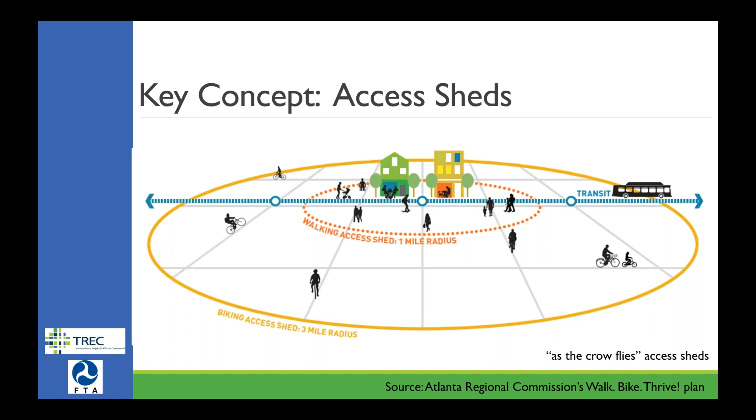However, in actuality, pedestrians and bicyclists are constrained to the available sidewalks, crossings, and bike routes, and agencies are increasingly looking to network analyses to calculate the actual distances for both pedestrians and bicyclists using the available facilities. These true travel distances more accurately illustrate how far someone would be willing to walk, taking into account the existing street grid, the existence of potentially poorly connected networks, barriers to travel caused by things such as railway, freeway, or waterway crossing points and limitations.

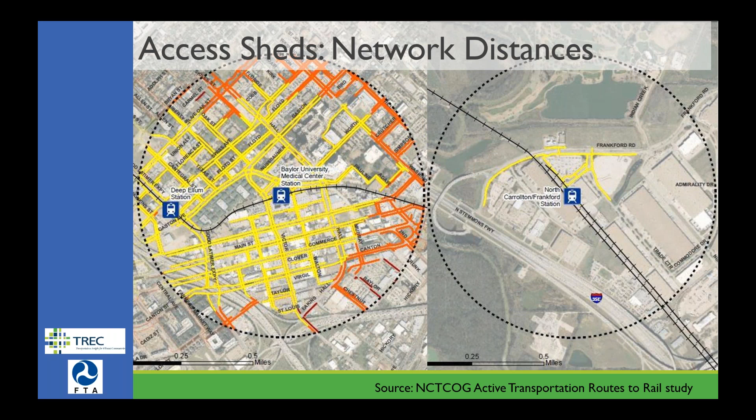In this example from the North Central Texas Council of Governments Active Transportation Routes to Rail Study, that's a mouthful, the yellow lines represent half-mile walk sheds taking into account the existing sidewalk network. So you can see, a well-connected network makes a big difference in how far someone could get within half a mile of walking. And this is an extreme example, but it shows the difference.

LA Metro, in its first last mile strategic plan, developed a program to improve and expand access sheds for users traveling to and from stations. And they propose to do this by increasing the average speed of active transportation users through measures that decrease crossing wait times, such as signal prioritization, and improved walking and biking speeds and capacity through route improvements; by decreasing the distance needed to access stations by fixing gaps in the network, adding crossing opportunities, and exploring creating shortcuts.

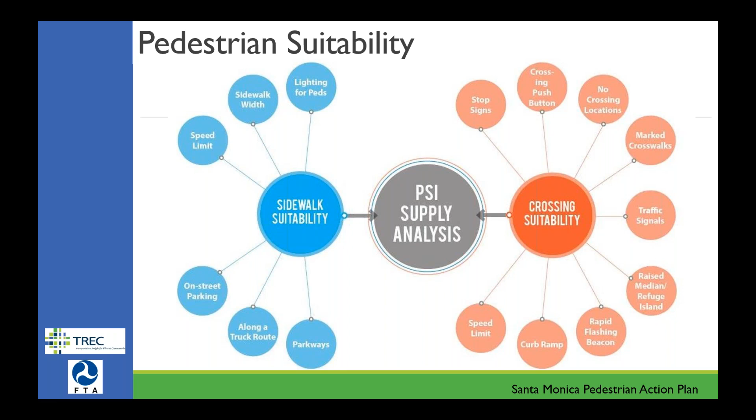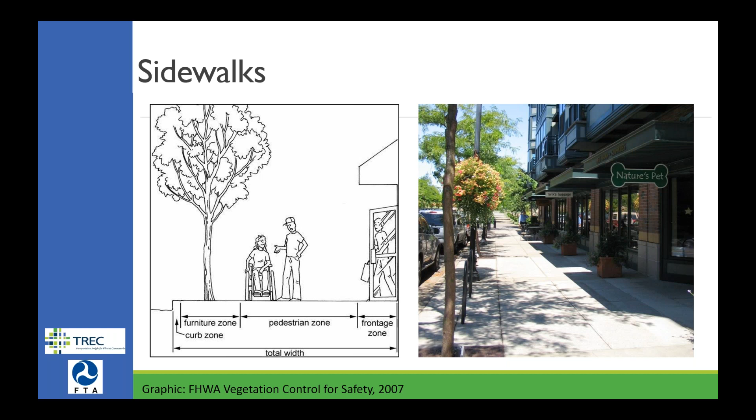In general, sidewalks should provide clear space for passage while taking into account other possible activities, from accessing buildings, as in the frontage zone shown in the diagram to the left, to features that increase comfort, like trees and benches, in the furniture zone, that can also be used for bike racks and that sort of thing, trash receptacles. But the key point is to have a walkable area where people can get by and get where they want to go.

And I'm going to go into a short case study here. So in this example from Atlanta, we learned that improving the road environment to and around bus stops can have a huge impact on the rider experience and rider safety. Many of you may have heard of the Buford Highway in Atlanta and suburban Atlanta. It's a 6-lane arterial that originates in Midtown Atlanta and serves as a vital connection to the northeast suburbs. In the last 15 years, a heavily transit-dependent Hispanic population grew up along the highway, increasing the number of people that needed to access transit along the busy arterial.

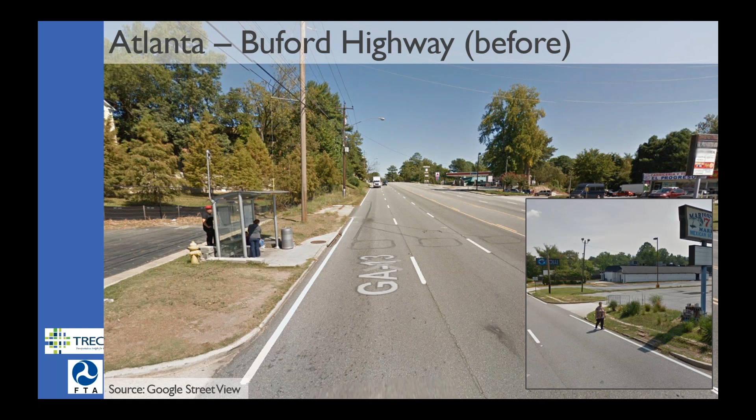The still automobile-oriented route had limited crossings, sidewalks, and other pedestrian infrastructure, leading to conditions that had led to numerous pedestrian deaths and injuries over previous years. The inset photo of a person walking in the travel lane on the right is not an uncommon sight if you go and look at past Google Street views of the Buford Highway, and it gives you a sense of what the environment was like there.

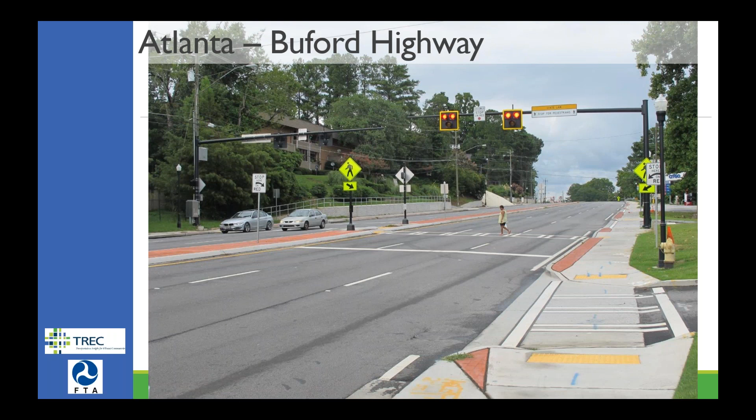I'm going to move on to a discussion of some of the needs for bicyclists accessing transit. One of the first things, as we talked about wayfinding with pedestrians, is also important for bicyclists. So bicycle networks around the station are also incredibly important. They should be safe, comfortable, and connected. And then wayfinding signs play a role in directing cyclists to the station and within the station as well to where they need to go. In the manual, we briefly touch on some of the ways to improve both bicycle and pedestrian networks, although really the idea is more to point people to where that information is in other sources, because this guidebook wasn't about networks as much as the access to transit itself.

So moving on to bike parking at stops and stations. While studies have found that many people who access transit by bike would prefer to take their bikes on board, providing bike parking is still an important role for transit agencies. Many agencies have restrictions on when you can take your bike on board, and oftentimes that's restricted during peak hours. Either way, capacity for taking bikes on board is often limited. Standard bike racks are an inexpensive way to provide parking, and they can be placed in an open plaza area or under cover to provide protection from the elements. Whenever possible, it's important to place racks in areas that are easily observable as a form of passive security for them.

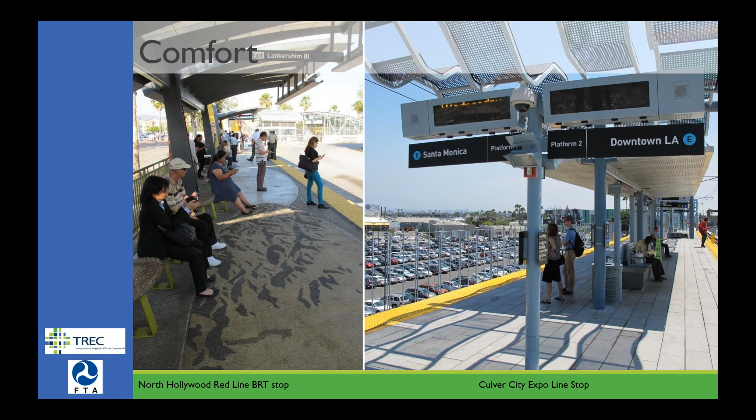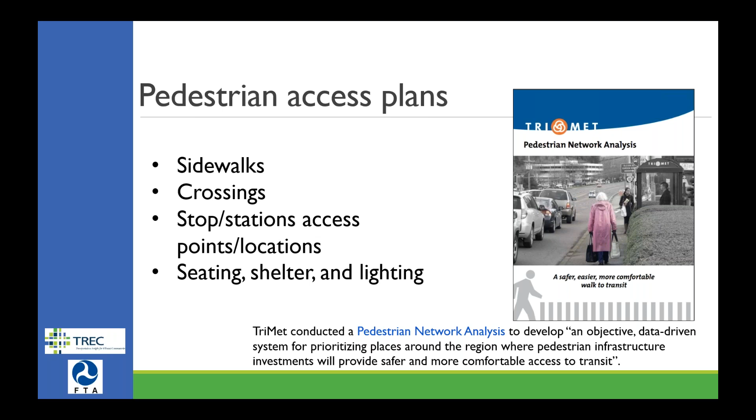And as you can see here, an example of this is the TriMet pedestrian network analysis. And again, the links to all of these are included in the manual document and to other plans as well.

And first and last mile plans focus on completing the transit trips for passengers by examining how they got from their origin to the stop or station where they board transit, and how they get from the final stop to their final destination. First mile, last mile plans generally start with a recognition that transit ridership depends on people being able to access it. Pretty basic concept, but it's worth really going into in detail to think about how that actually happens.

Improving conditions for pedestrians and cyclists in the areas around the origin and destination stops can extend the effective reach of the transit system and thereby increase the potential ridership base, as well as making the transit process just smoother, faster, more enjoyable for people.

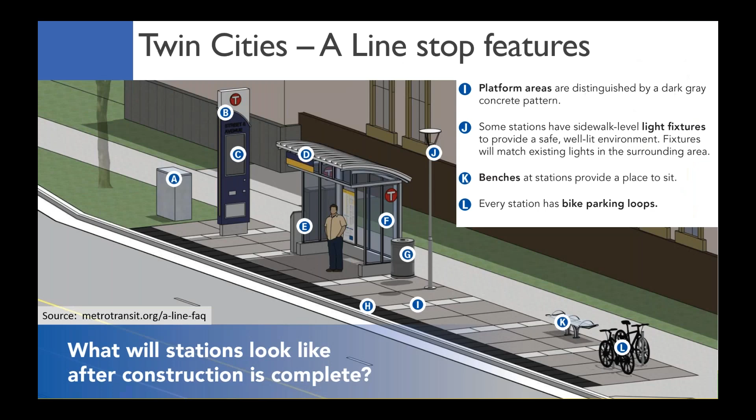Edwin, did you have anything you wanted to add to the FTA's determination of that distance? Actually, I do. Besides what you said, which is very accurate, it also is a case-by-case basis. It's not a standard cookie cutter for all of the projects related to bicycle and pedestrian infrastructure or improvements. It's something you will have to work on with FTA, our regional folks and our Office of Planning and Environment to see if you need more than the distance stipulated in the policy. So it's basically a case-by-case basis, and you nailed it when you mentioned the research done.

And also to mention that this only applies to the transit side of the Department of Transportation, meaning FTA. The other reason why we did what we did is because we didn't want to overlap with the Federal Highway Administration. They have a different set for their program and their funding. So it would be worth checking depending on your city and your project. Okay, great. Thank you for that.

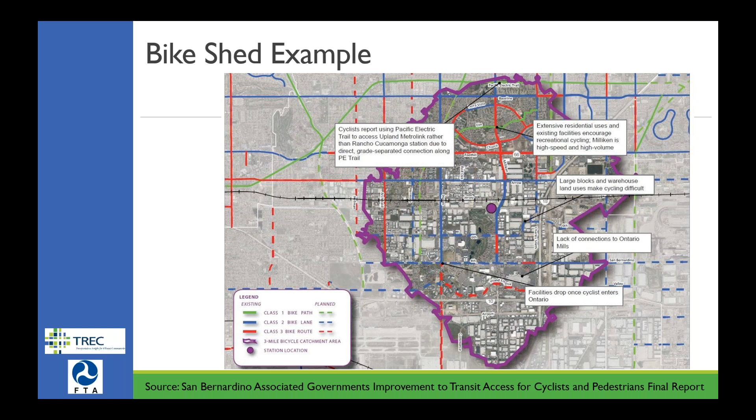And let me go back to that slide. Again, the reality in most places is restricted by whatever those barriers are. That's the center there, where you're not quite getting out to what you would expect if there were a perfect network. But the goal is really to make the walking and biking environment so nice that people would actually go further than whatever the policy is. So maybe further than a half mile or a mile walking, further than 3 miles biking. If it's really easy to do it, you get more people that would be willing to do it.

Great. And then in regards to the prior question, one of our audience members commented that an example you can look at is Metro's Active Transportation Strategic Plan, which took into consideration topography when determining the walk and bike shed. So that's a resource for topography.

And a couple audience members have questions on the resources and the collaboration that was used for the report. So how is the work that went into this document being coordinated, or has been coordinated, with the APTA bike accessibility work that's being completed?

So that's a good question. So most of the work that went into this was completed in the fall of 2016. So unfortunately, we didn't have a lot of opportunity to coordinate with them, though I will be in touch with them and thinking about how these pieces fit together.